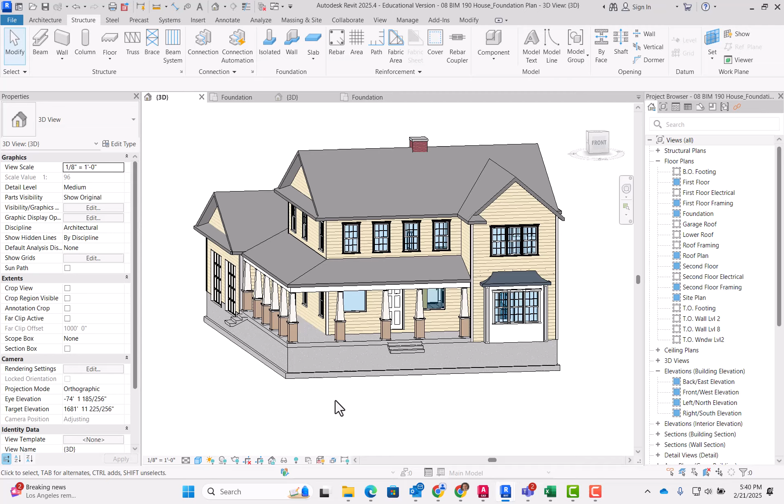In this video, I'm going to show you how to start making your foundation plan. Now, the first thing you want to do is make sure that you've got foundation walls and footings underneath all the exterior walls and below the porch. That also includes the garage. If it looks something like this, then you're ready to get started on the foundation plan.

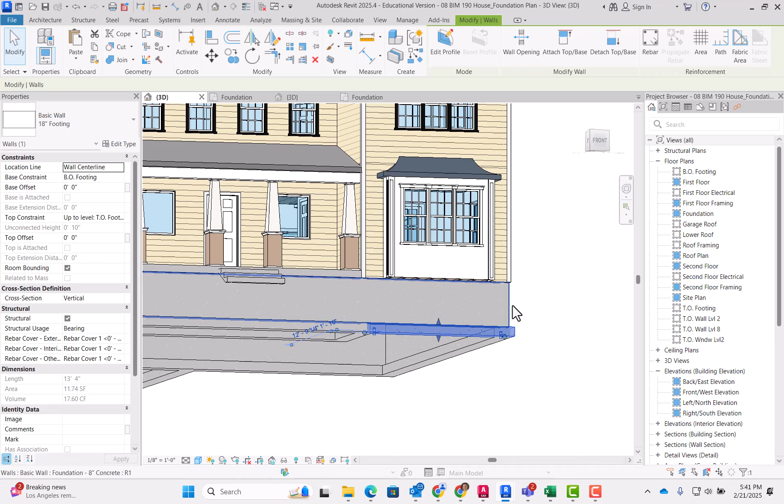Remember the depth of this. We're putting the bottom of footing directly on top of the frost line, so it's about 3 feet below grade, and the grade starts about 1 foot below the top of foundation. So grade is here, then we go another 3 feet down. If all that's in order, let's get started.

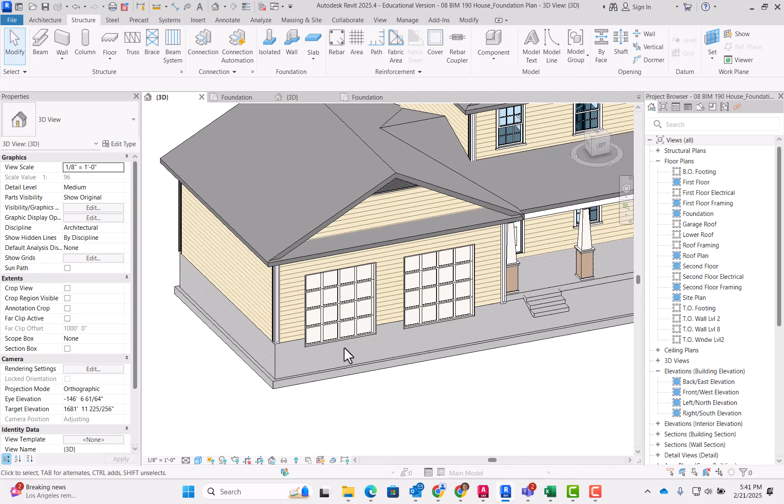One thing I'll mention is that right here we've got a slab, and you should have a garage slab in place by now, but even if you don't, it doesn't matter. It won't have any impact on this drawing. Something that will have an impact on this drawing are doors that are supposed to be set down at grade level. So this door, for example, is set at the level for foundation -1, because again, we're assuming that the ground or the grade hits that line right there. So this has to drop down to that level.

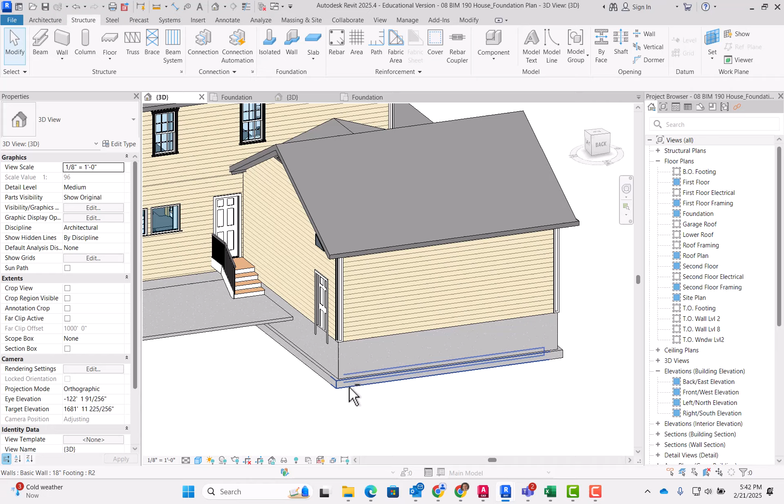When you do that, you need to have a little cutout in the concrete, and that's actually going to show up in the foundation plan. Now there's a real quick, easy way to do this. You can see on the back of my house here, I've got a man door into the garage. It's set down at the right height, but it's not cutting into that concrete wall. So you're going to have a hard time getting that thing open and closed, getting through there.

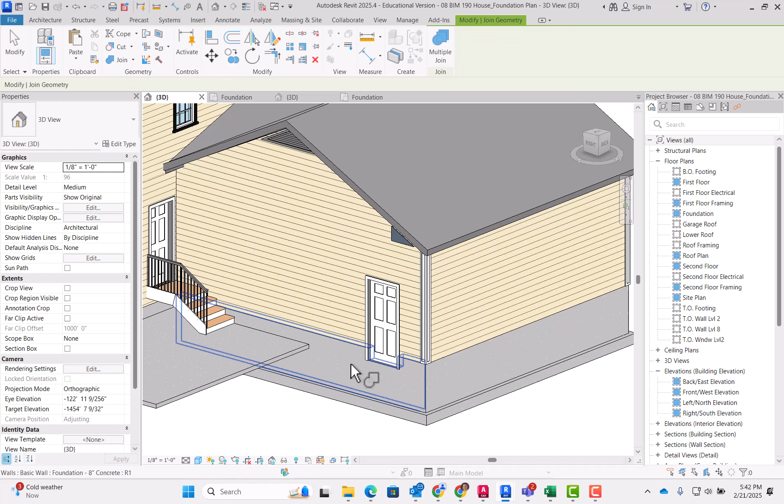Here's what we need to do. Select the wall, go to Join Geometry, then select both walls, the top one and the bottom one. If you can't select it, then you might have the Select by Face turned off. I'm going to click on that wall, then the bottom one, and you can see it just cuts it out for you. And again, that will actually show up in my foundation plan. So let's go ahead and see what the foundation plan looks like.

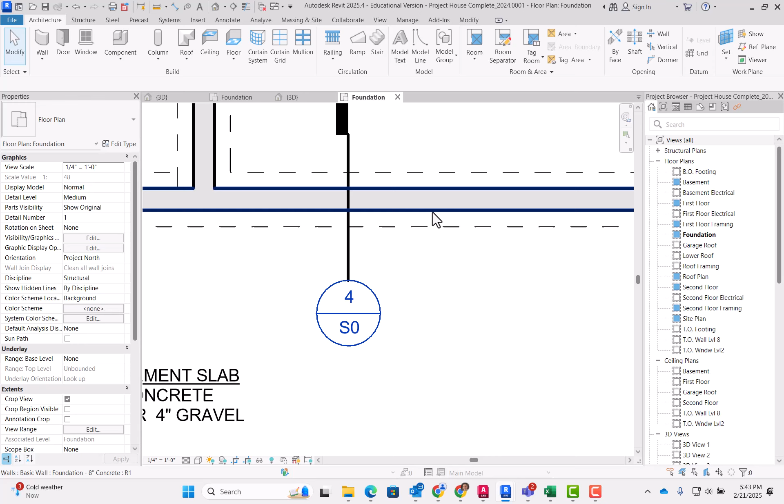We've got annotations. We've got the walls that are showing with a solid gray fill, a pattern. We've got dashed lines for the footings, and we've even got some details to show what the concrete looks like in section. So there's a lot that we need to do to get our project up to speed. Let's go back and start making some of these changes.

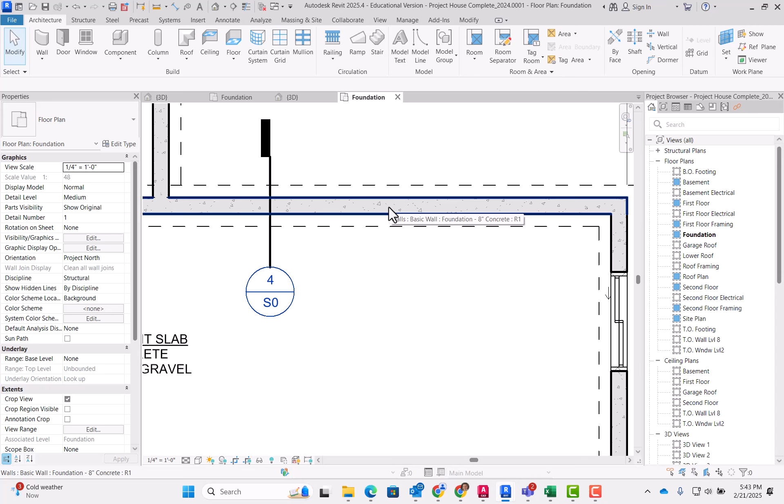Before we go, actually, I want to point out, notice that what's happening with the solid gray fill here is that we're showing there's a material there. And the fact that you see these bold lines around the concrete is an indication that we're cutting through that material. Anytime you see a light line, you're probably looking at the outline of an object. Anytime you see a dark line, Revit always knows to show something with bold lines to indicate you're cutting through something. And people that understand construction documents, they know to look for bold lines to show that we've cut through an object.

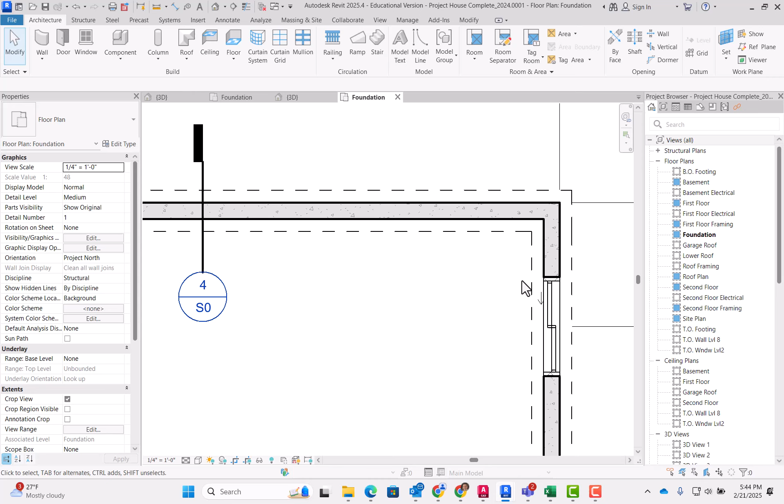In this case, we've got, instead of solid lines for the footings, dashed lines, and that's because these footings are down inside the earth. They're being covered up by something. We are looking at their surface, or if there was no dirt in the way, we'd be looking at the surface, which would just give us a solid thin line. But again, it's covered up, so we don't see any material there, and we're showing dashed lines because it's down inside the earth.

Now, what about this other pattern? We've got triangles and little dashes everywhere. That's the pattern that we always use to indicate concrete. And concrete is represented this way because it's comprised of both cement and aggregate. Let me show you a picture of aggregate.

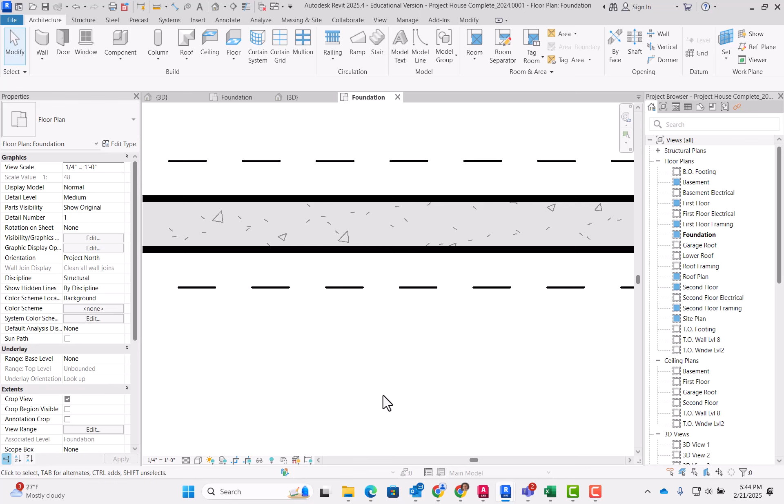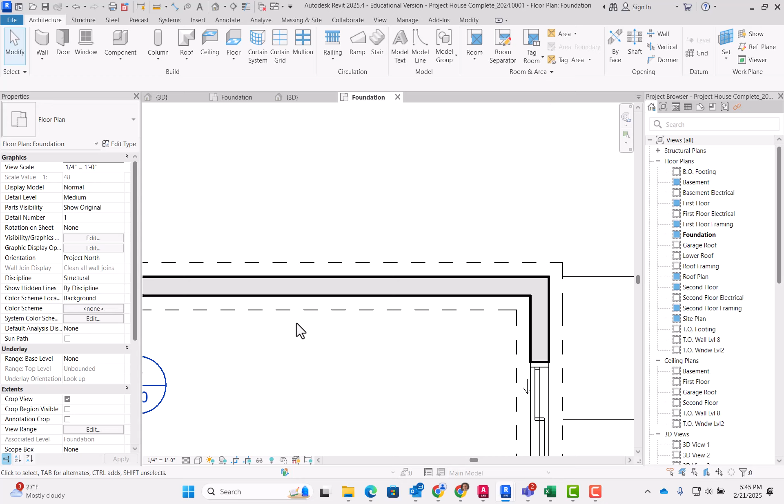Okay, back in the foundation plan. What do I need to do? Let's start by hiding things. You don't need your elevation markers turned on. If you select one, you can do VH, and that's category hide, so now they've all been hidden. And then the same thing with the sections, I'm going to do VH. If you only want to hide one of something, then you would type in EH, and I'm going to do that for the stairs because I don't want to turn off this stair.

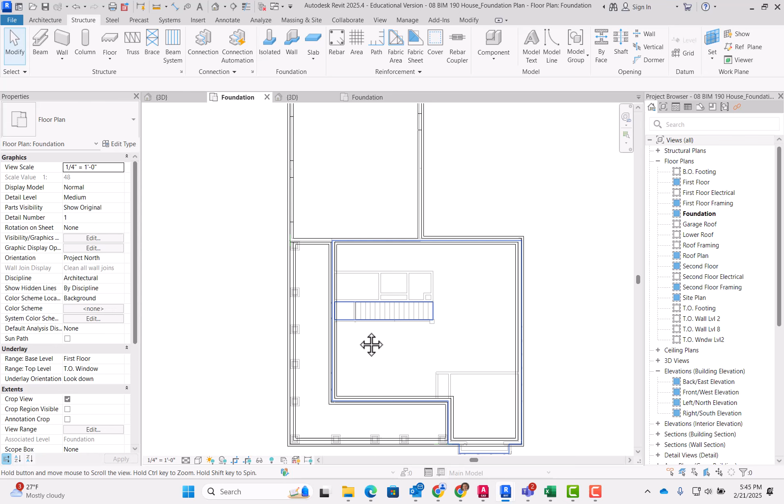It's not that I want that to show up in the drawing, I just need to know where it's at, so I'm going to leave that one turned on. Okay, the next thing is that I've got an underlay, and that just makes too many lines overlap. It's the first floor underlay. So even though we'll have to turn it back on later so that we can put footings underneath that stair, for right now I want to turn it off.

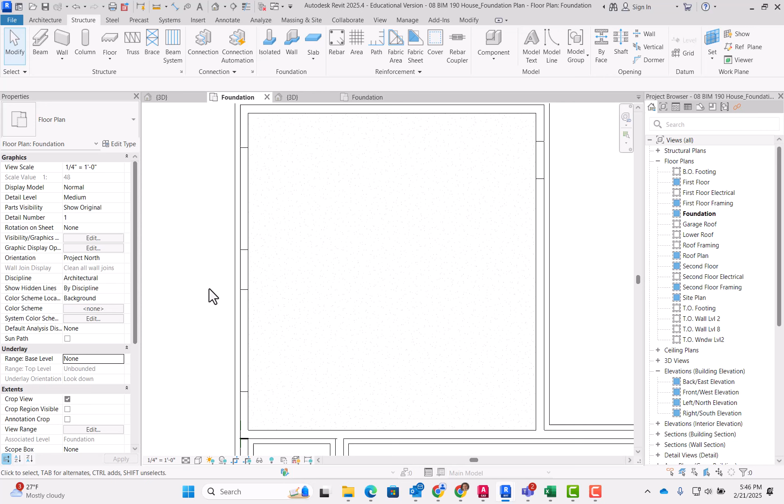And we're going to change our underlay to none. It's already looking a lot cleaner. You can see that those areas where the doors drop down, we've got the cutouts in the concrete wall, and we're going to call that out as a block out so that the contractor knows he's got to leave an opening for doors. Here's my foundation slab. It's going to cover up the footings to the inside, so I'm going to hide that, EH for hide. And we're left with just what we need, but it's not displaying properly.

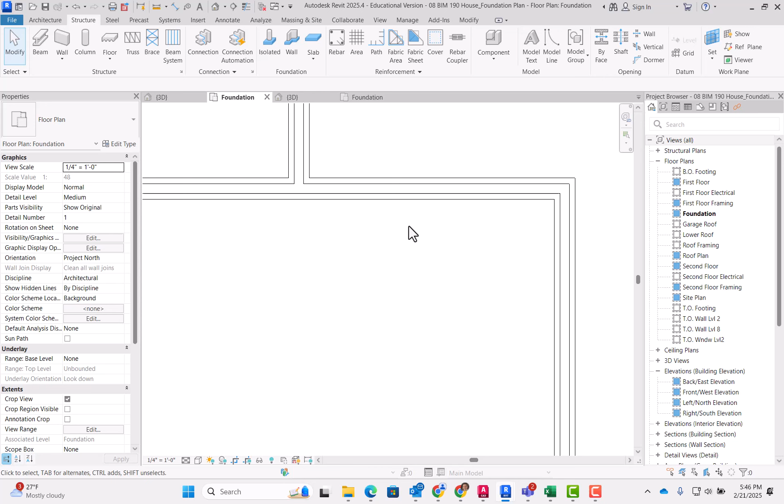The way that we can change this is, first off, let's make those footing lines dashed. To do this, we'll go to Visibility Graphics, and we're going to go find the Walls. Now you can type it in as walls if you want right here. If you don't do it that way, this is what I usually do. I just click anywhere and type in W. And then it brings up all the categories that start with W. Okay, and down here we find our walls.

What we're going to do is give this a visual override. So anything that we assign in the right column will change the appearance of the wall over here. And footings are actually considered walls, at least the way that I created them. They're considered walls in this project. If you struggle and you're not able to change the appearance because you created it a different way, then you might want to go do the same thing that I'm about to do for a structural foundation. But for right now, I'm going to stick with walls, and I'll show you what it's going to do.

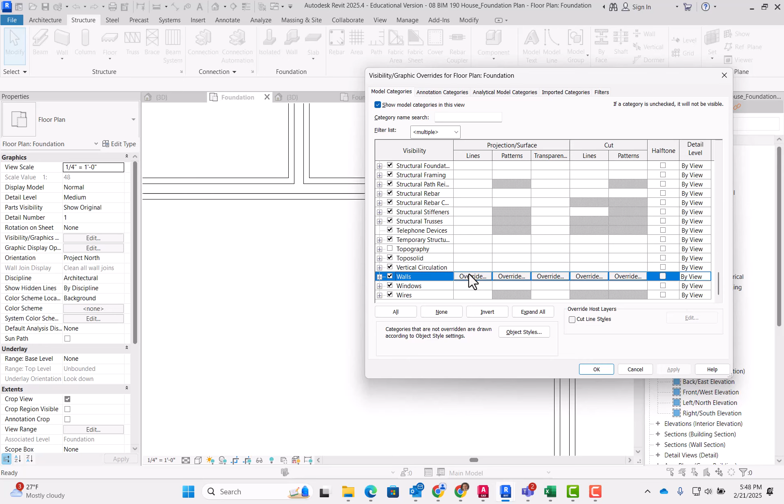If we're going to change the appearance, we need to find just the right column that pertains to whatever it is we're looking at. In this case, we want to use a projection surface, because that implies you want to change something that you're looking at the surface of, as opposed to a cut. This would change anything that you're cutting through. As of now, we're not cutting through anything, and I'll show you how to know if you're cutting through something in just a minute, but right now you can take my word for it. We are, however, looking at the surface, and we want to change the line style. So that's going to put us over here in this category.

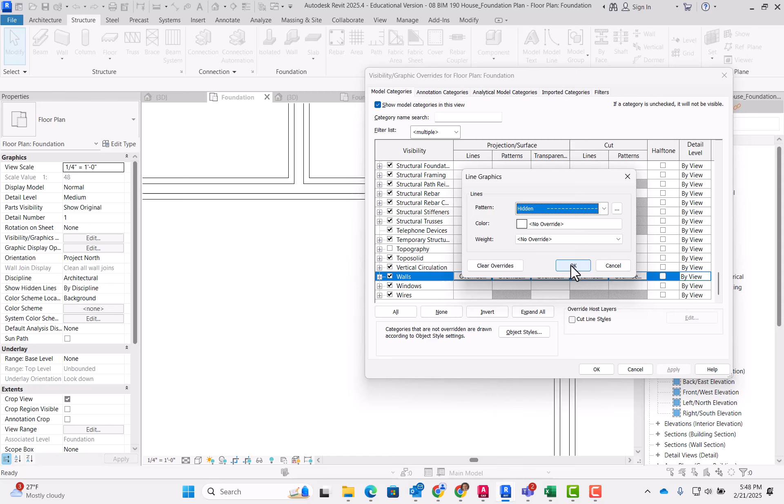We want to change the line, and we want the pattern to become hidden. It's down here at the bottom, but same thing. You can just type in H, and it'll move your cursor to the H's. And I'm going to choose the hidden option. I'll click OK, OK again, and surprisingly, it made everything dashed. Now, for the moment, that's okay. Let's just leave it there for now, because we're about to change something in our view range, which will allow these to become solid lines once again.

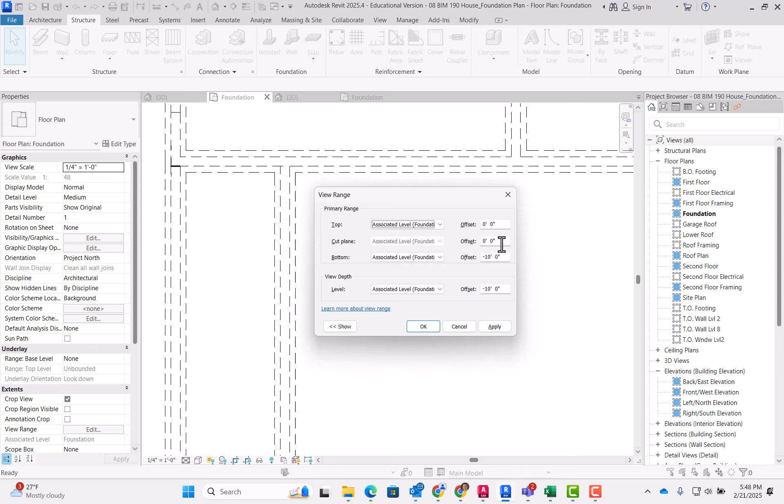If I go to view range, VR, the reason why these are all dashed is because according to my cut plane, we're looking at the surface of everything here. We're not cutting through anything. The cut plane, if you look at the little preview, it's this line right here. It's a line that's actually low enough so that if you were to look at it in section, it would be inside of, in this case, a wall, or the wall in the background here, or that door. It would miss the window. But the cut plane is the height at which you want to cut through something in the view.

And right now our view says that we're cutting at a height of 0. So we're right at the top of the foundation. And none of these walls extend up above the foundation, so we didn't cut through any of them. If we drop it down, we can't go too far. If we go down by a foot, we might miss those doors. I'm talking about the doors in the garage. If we just go down 6 inches, then we should cut somewhere below the top of the foundation, but also above the bottom of the door.

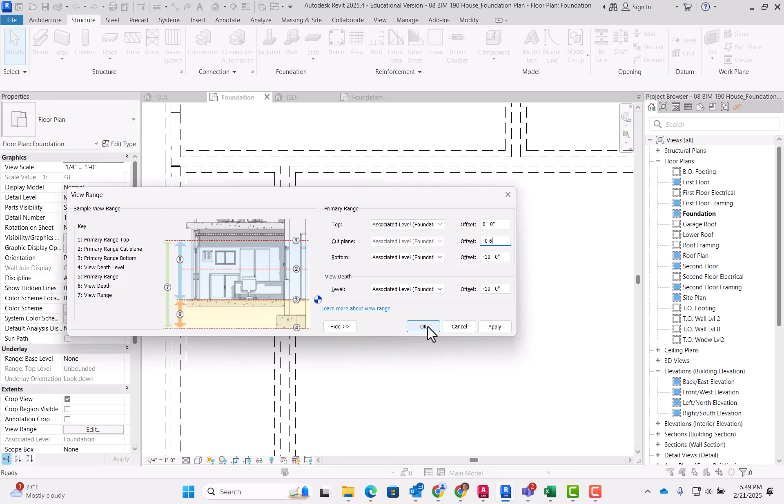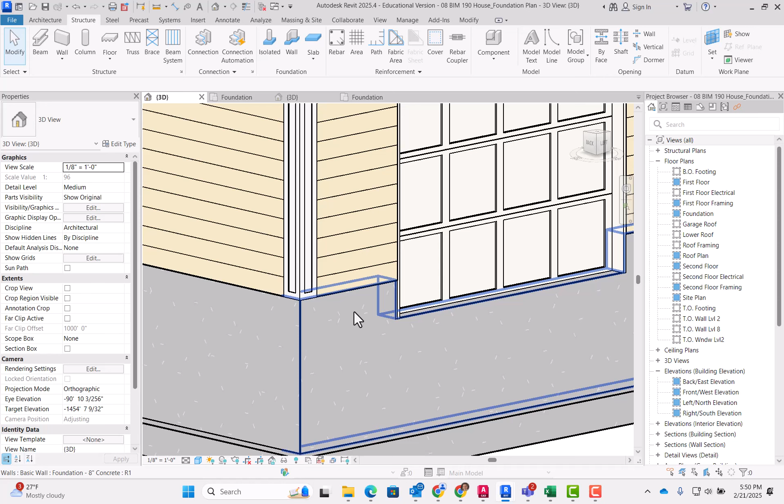Click OK, and voila. You can see what that did. Now it's trying to say, you're cutting through all these things, so we're going to put a bold line on there, and by default, we always put a material into something that's been cut through. Perfect. And just to better explain the 6-inch principle, here's 0. We were cutting through right there at the top of the wall. When we drop it down 1 foot, we'd be right here, and we would miss the opening. If we drop down 6 inches, we're right here, and we're cutting right through that opening. Now, fortunately, the garage door doesn't show up.

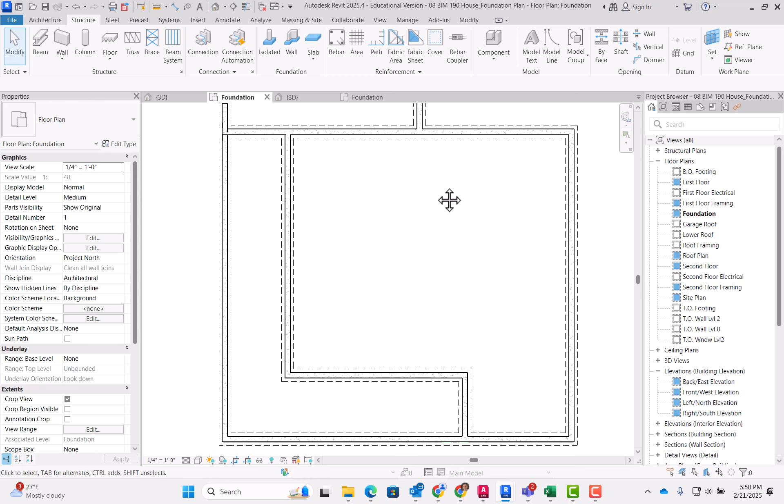If it does show up, hide it, but it shouldn't. And now the only thing left is that even though I can see my walls, they don't have that gray solid fill. And I just like to do that because it makes this drawing easier to read and understand. Okay, to do that, go ahead and select any concrete wall, edit the type, edit the structure, and we're looking for the material. We're going to make a change.

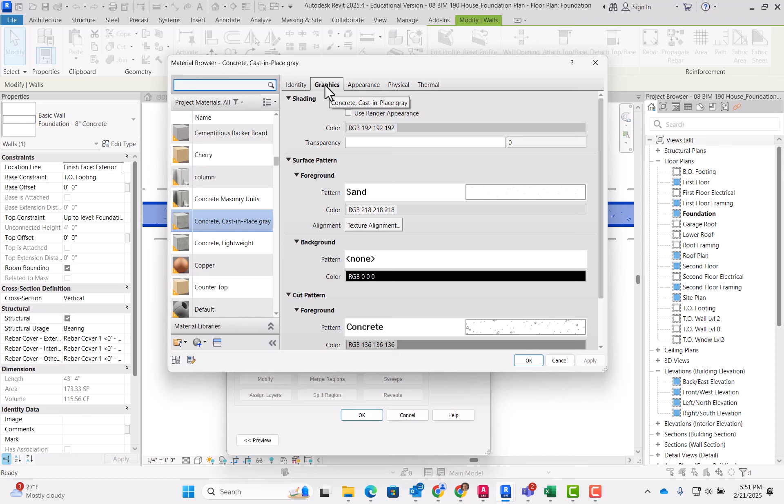Right now, in this material, under the Graphics tab, which is what we use for construction documents, anything that's displayed in construction documents will be adjusted by the Graphics tab. So it has nothing to do with the appearance of the imagery here. But looking at this, you can see that in a cut, it's programmed to show that concrete hatch pattern with the triangles. And the background is set to none.

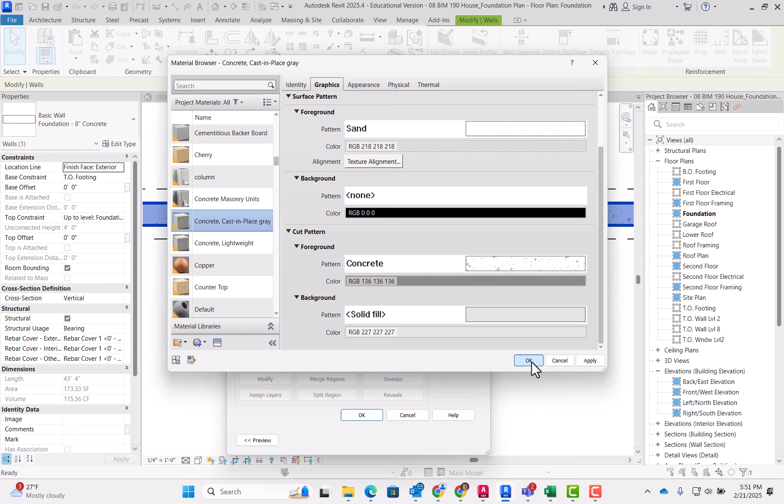So I'm going to change that to be a solid fill. And I'm going to give it a really light color. Just click on the color. I'll move that up, something like that. And then click OK, OK, and OK. And there you have it.

Now, anytime concrete gets cut through, it's going to show up with that color. And of course, it's still going to include that pattern. And the reason for that is because we did a background and a foreground. If we had replaced the foreground, then we wouldn't be seeing all these little triangles. Okay, perfect. Our foundation looks great now.

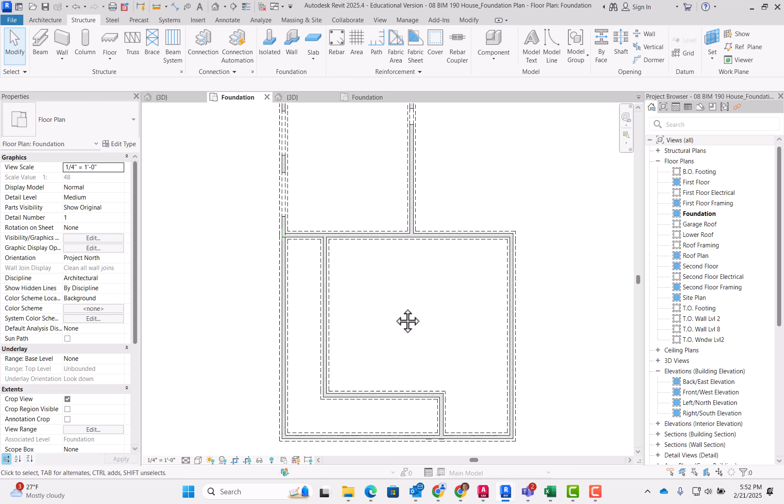The only thing that we have left to do is I'm going to have you guys thicken up the wall along the front of the porch. And some of you won't even have this condition. But anywhere that you've got a wall with concrete that's going to go over the top of this wall, and then it's going to go back and it will stop right at this wall. So we have a bit of a problem. There's nothing for that porch to sit on.

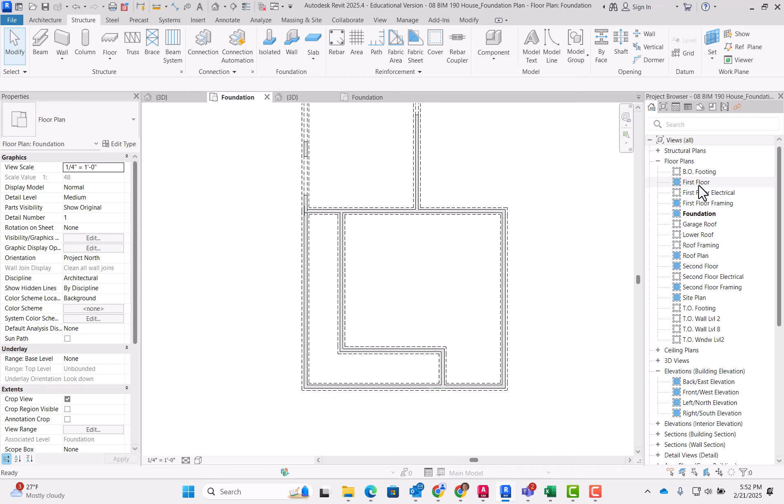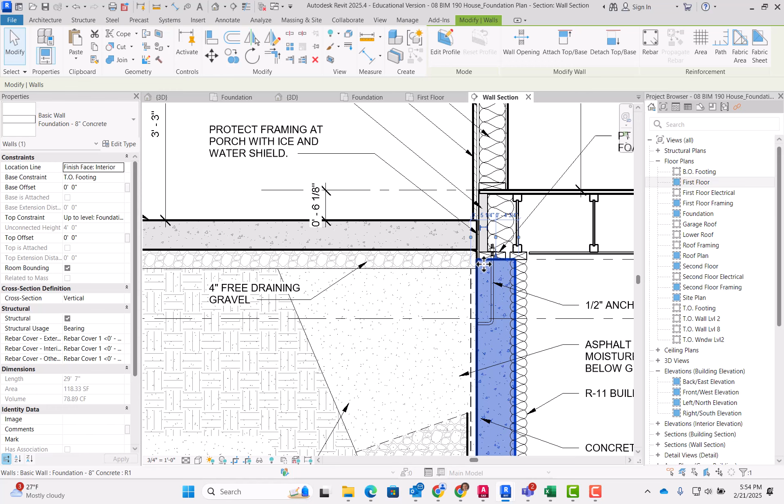And in a regular section, you can see this a little bit better. Now, I've already made some kind of an adjustment, I'm going to fix this really quick. Hold on. Okay, this is what I had meant to show you. Something more like this, where this is the porch slab, and it extends back, and then it has nothing to sit on back here. So what we're going to do is take this wall, and we're just going to make it a little bit thicker, and it'll bump out to the front, and then there will be something for this concrete to sit on.

Now, whenever I made these changes, I don't know what happened here, but this is all wrong. So I don't want you to get too confused. Yeah, let's just delete it. This is what it should be. This wall just needs to go up. That's what I would expect to see, but let's ignore all these problems because I've made a lot of changes in this project. It'll have to be fixed later.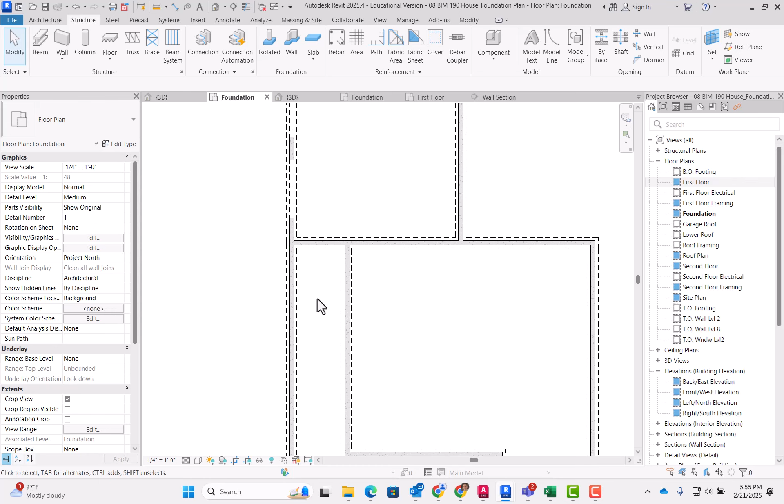Okay, another problem that I notice is that that footing is slightly out of position. You're going to have to move your footing, and I'm probably going to leave my footing because as soon as I adjust this wall, it's going to bump forward, and then that footing might be in the right spot. So let's start by taking this wall, and let's go around to the side. We'll get this one too because my porch is going to go here, rest on the wall, and go from here, rest on the wall.

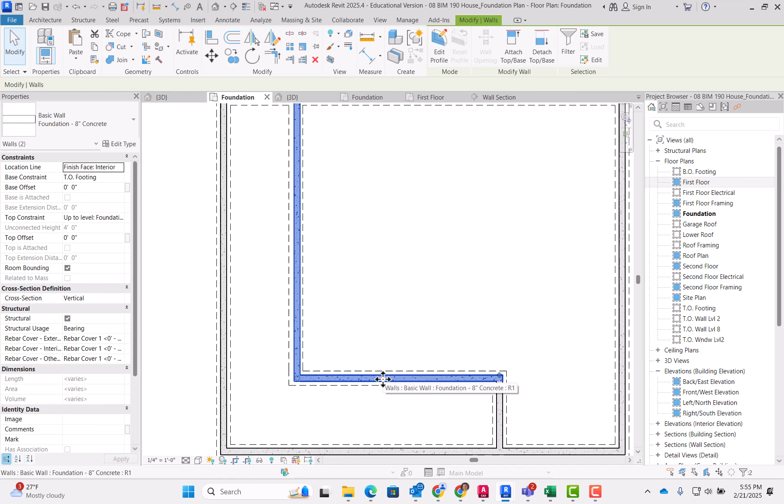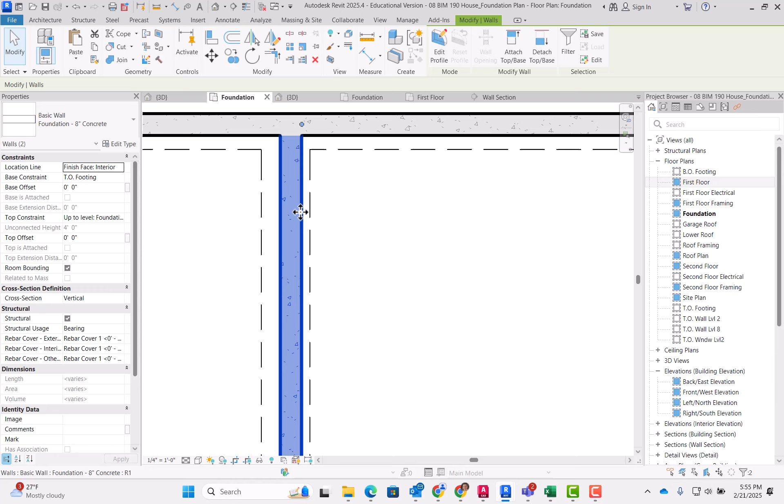Okay, I need to adjust the location line. It may be set to wall centerline, or better yet, I think it was set to finished face exterior. We don't want to use that anymore because if I want it to bump out on this side, the exterior face is going to be a problem. So we'll go finished face interior for both of these. I've got them both selected.

And then if you don't have a 10-inch concrete, make one. If you do, select it now, and you can see that got bumped out, and I still do need to adjust my footing. I want it to be centered underneath that wall. The way that you would make a 10-inch concrete wall if you didn't have one, you just simply duplicate it, edit the type, and put in 10 inches of thickness here. Okay, let's go back to that section.

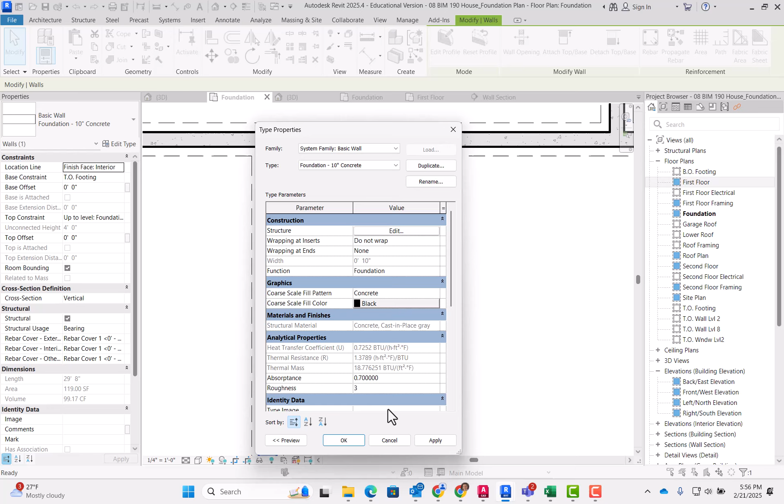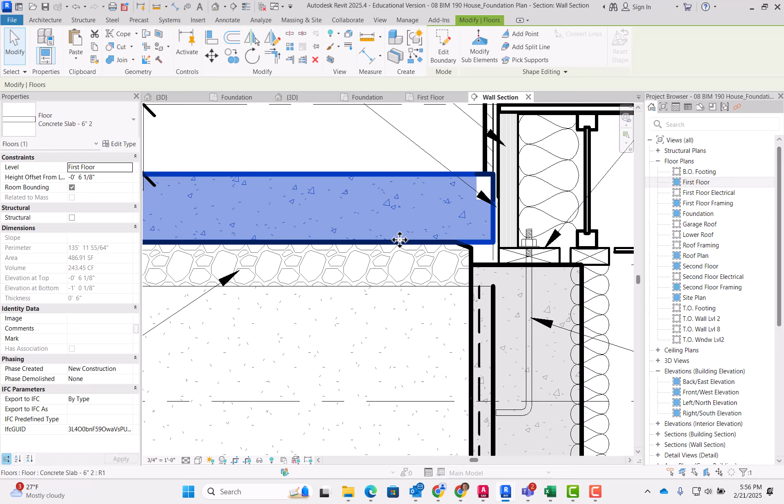And now, if I move this hatch pattern out of the way, just pull that over so you can see, my concrete extends all the way out to here. My porch still doesn't touch it. We're going to put on a little cap over here that's going to allow that to drop down, and then it will come over across the front, and then it will angle back. And then it's just got like a little foot to sit on to extend it down to that concrete wall. But that's the principle, and that's why we're doing it.

So back in the foundation, now that I have a 10-inch wall, you can tell that one's thicker than the rest. We're done. And you're okay now to go on to the remaining videos to finish out your project.